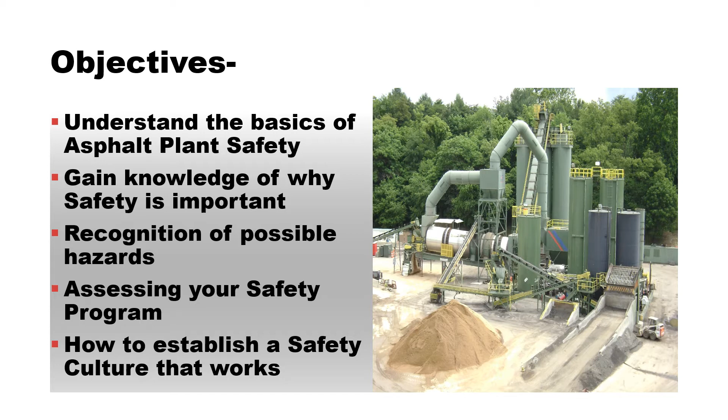Safety has to be valued by each of us and our co-workers to have a successful safety culture within our companies. The main objectives of today's training are really to understand the basics of plant safety and why safety is important within our facilities, hazard recognition, safety program assessment, and how to establish a safety culture that works.

Before we get into plant-specific safety topics, let's talk about Occupational Safety and Health Administration, or OSHA, 2018 statistics. Indicated on the slide are the number of fatalities that occurred within the construction industry. Of those fatalities, falls accounted for 33.5%. Each of these categories listed are OSHA's Focus 4 emphasis topics, which account for more than half of construction worker deaths nationwide. If these hazards could be eliminated, 591 lives in the U.S. each year could be saved.

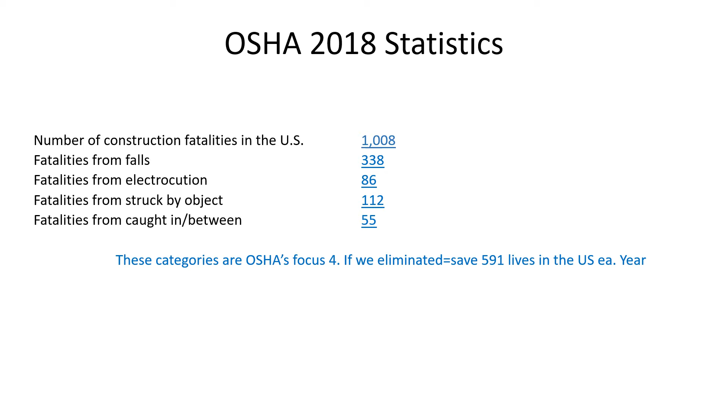All of these hazards are present within the HMA plant setting, so the statistics are relevant even though they are for construction and not specifically general industry. I think all of us can agree, at the end of the day, we want every worker to make it home safely to their family and loved ones. In an effort to make our employees safe, OSHA mandates that we meet certain safety standards to maintain compliance. We also need to be concerned with the human component or the behaviors of our employees.

The best way to start the work shift is in a daily huddle. These meetings have different names. To name a few, it's JSA, JHA, Daily Huddle, Toolbox Talks, Safety Talks. Whatever the name, the goal is at the beginning of the shift, the entire team gathers for 5 to 10 minutes to discuss the tasks for the shift and to identify what hazards are associated with the scope of work. Lastly, they talk about those hazards and how they're going to be mitigated.

So let's identify some hazards that exist at the plant, and we will discuss several of these in depth in the upcoming slides. There are many areas within the plant that burns can occur. Hot oil line surfaces, liquid AC, and tack transfer points are a couple. Maintenance frequently occurs at heights, so there is a need for a fall protection program. Electrical rooms and high voltage create hazards for our employees, and equipment in operation in our facilities, along with vehicle traffic, are definitely a safety concern.

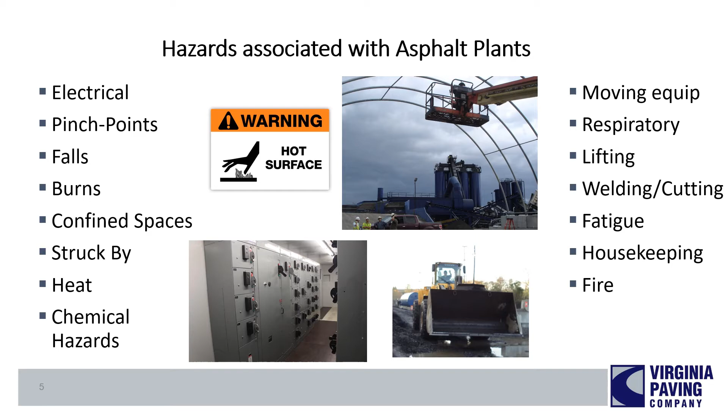The question is, who is at your plant? On any given day at a typical asphalt plant, there are numerous people that could be on site, both asphalt plant employees as well as numerous visitors that might only be there for the day or even just a few minutes. Therefore, it's critical that steps are taken and procedures are put in place to ensure the safety of anyone that might be on site for any length of time. Keep in mind, non-employees of the asphalt plant are quite possibly at a higher risk of injury due to their lack of familiarity with the plant operations and safety protocol.

Typically, our plant yards have a lot of movement between truck traffic, equipment moving around, workers and visitors on foot, and these individuals present potential hazards such as runover, backing incidents, distractions, lack of PPE, unfamiliarity with the plant setting, different safety cultures. Sometimes there's congested areas. So what can we put into place to minimize the exposure to these folks?

One of the tools we can put into place to get equipment, vehicles, and workers on foot and pedestrians safely around our sites is to implement an internal traffic control plan, commonly known as an ITCP. An ITCP is a process that supervisors and others who have responsibility for the plant site can use to coordinate and control the flow of construction vehicles, equipment, and workers operating on site, basically creating zones designed to minimize interaction between workers on foot and vehicles and equipment.

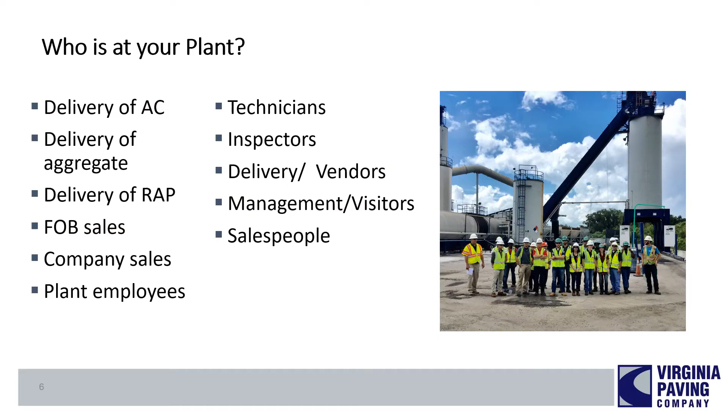Operational hazards are any condition or act that affects or may affect the safety of employees or associated personnel or equipment. Within our plants, there are many types of operational hazards, some of which are electrocution, struck by, caught between, and falls, which we talked about in the earlier slide with the OSHA statistics, and confined spaces. So let's talk about a few of these more in depth.

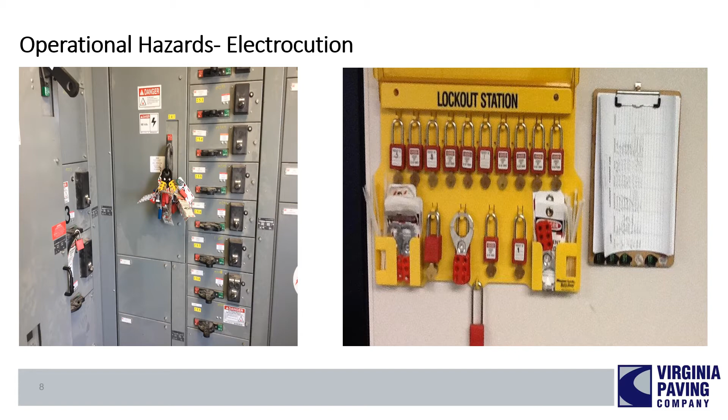While not a substitute for competent person lockout tag out training, let's identify the proper steps. To begin a shutdown, of course, we have to prepare. We're going to shut down, turn off equipment, isolate the energy source, apply the lockout tag out to the energy isolating device, release all potentially hazardous stored or residual energy, and most importantly, we're going to verify the isolation before the work begins. Then to start up, it's basically the process in reverse. Most important step here is to assure that all personnel are aware the startup's going to begin and that everyone is all clear.

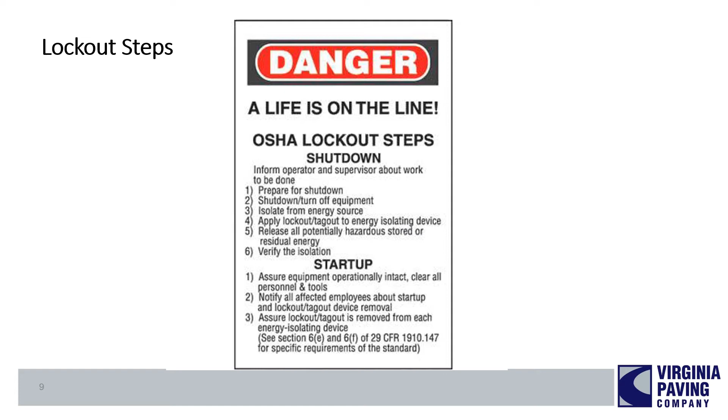What is also required training in the plant setting is NFPA 70E non-qualified or qualified electrical training, depending on the employee's role. To put these definitions into working day practice, a qualified individual is one that, as part of their job responsibilities, works with or may be exposed to live energized electrical components. The rest of the staff that does not have these functions or exposure are considered unqualified.

One of the more common burn hazards at the plant is related to asphalt cement. This product is continuously being delivered, offloaded, stored, and pumped through the mixing operation of the plant, all of which is being done while the asphalt cement is at an elevated temperature to reduce its viscosity and allow it to be mixed with the aggregate components. When producing asphalt, plant production temperatures are elevated enough so that the final mixture can be loaded out at temperatures in the range of 300 degrees.

Be mindful to stay out of equipment operating zones or EOZs. Establish visual or verbal communication with operators and drivers when you intend to cross in front or behind them, and once you've passed in front or behind, make communication to let that operator or driver know you're all clear. There are many blind spots on the equipment and vehicles. If you can't see the driver or operator, then they can't see you. Never assume. Backup alarms should be installed and functioning on all moving equipment such as loaders, skid steers, backhoes, and haul trucks.

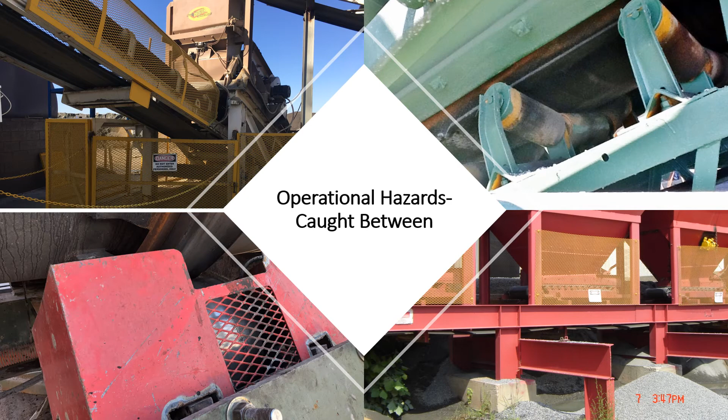Again, as a reminder, when routine maintenance or attention is needed, appropriate lockout tag out procedures should be followed.

There are several places at the plant where we will find confined spaces, some of which are the bag house, cold feed bins, silos, the drum, pug mills, drainage structures, and tanks.

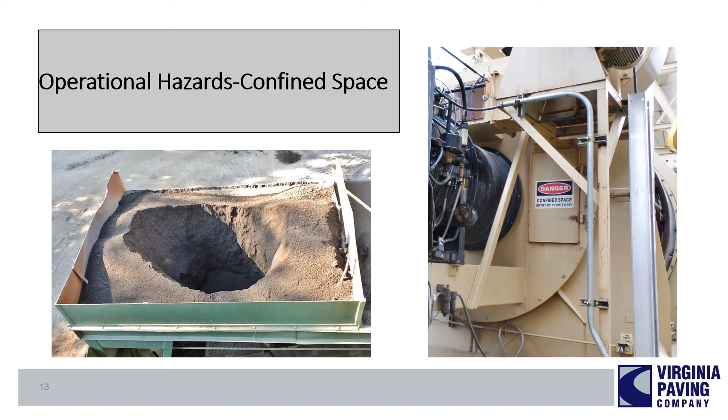A confined space means it's a space that is large enough and so configured that an employee can bodily enter and perform assigned work, has limited access or restricted means for entry or exit, and is not designed for continuous employee occupancy. Specific training for entry into confined spaces is required.

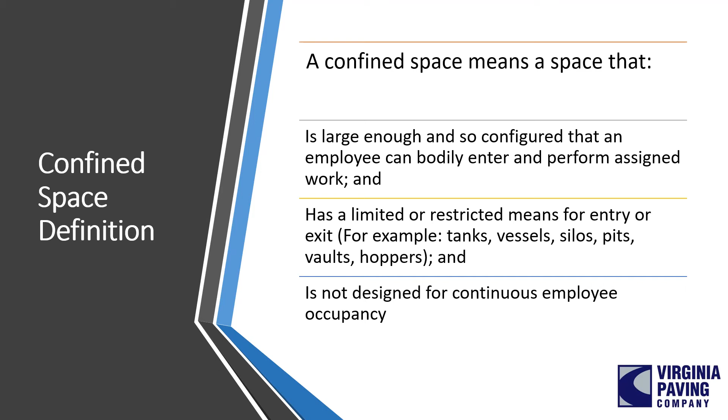A permit required confined space meets the definition of a confined space plus has one or more of the following characteristics: an internal configuration such that an entrant could be trapped or asphyxiated by inwardly converging walls or by a floor which slopes downwards and tapers to a smaller cross-section, or contains any other serious safety or health hazards.

Some confined spaces may require air quality monitoring and an active removal system. During entry, air monitoring equipment tests the atmosphere for dangers such as oxygen deficiency or enrichment. Competent person confined space training can provide guidance on when those measures are needed.

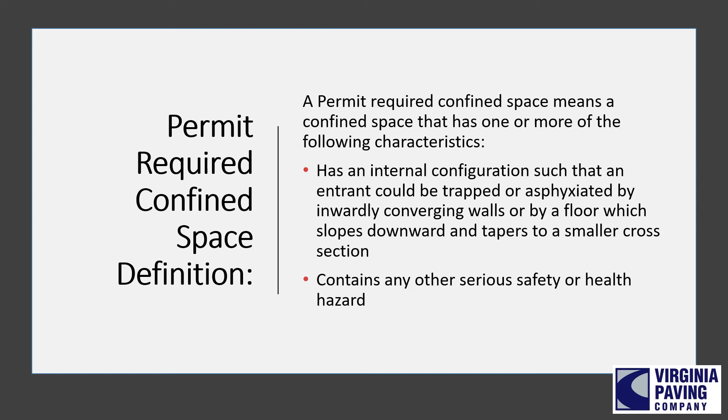Around the plant, there are many daily operational and/or routine maintenance tasks that require workers to be at elevated positions, which could lead to either serious injury or death in the case of a fall.

Some of these instances include work performed from step or extension ladders or man lifts, sampling mix on the sampling rack, working on top of the silos or the bag house, walking on catwalks, or simply getting on and off large equipment. In many of these cases, proper utilization of harnesses and other safety gear practices should be followed.

To prevent falls, 3-point contact is a safety practice that should be used and used properly: 2 hands 1 foot, or 2 feet 1 hand. You want to hold on with good grip, even if your descent is not far, in case your footing slips. If you had to face forward to climb up, face forward to climb down. Never jump from equipment or vehicles.

There are OSHA standards in place regarding fixed ladders. OSHA 1910.28 requires that each employee is protected from falling in a ladderway floor hole or a ladderway platform hole by a guardrail system and toe boards erected on all exposed sides, except at the entrance to the hole where a self-closing gate or an offset must be used.

The yellow self-closing gate pictured at the top of the fixed ladder is what many of our plants have been outfitted with due to this requirement.

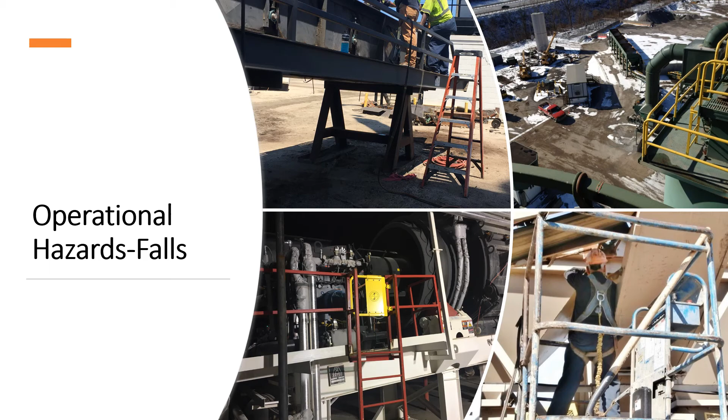We have briefly mentioned a couple maintenance hazards during previous slide discussion. Routine equipment maintenance is going to occur. Tasks such as welding and cutting, changing bags in the bag house, changing flights in the drum, changing belts, or simply addressing hydraulic leaks are eventually going to be necessary.

So when it does, always practice good safety procedures such as lockout tag out and the buddy system. Any tank welding and hot work should have special consideration as these operations are high risk.

The use of cranes for maintenance is sometimes necessary. Make sure trained personnel are operating the crane and assisting with rigging and signaling. And as a reminder, there are specific requirements when critical crane lifts are being performed.

Hand and power tools need to be inspected prior to use and always utilize the right tool for the job. Pneumatic tools are commonly used during maintenance.

In the photo, you can see an individual using an impact gun in the drum to remove nuts from flights for replacement. While backing the nut off, his left hand got caught between the handle of the impact gun and the drum, leading to a first aid caught-between injury, even though he was wearing gloves. Was this the right tool for the job he was doing?

Air compressor connections should be secured to eliminate the possibility of hose disconnection during use.

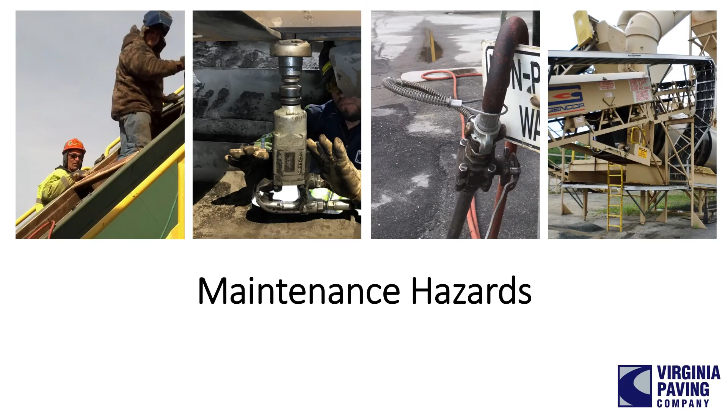There are some health hazards encountered at our plants. There should be team members certified in first aid and CPR at our facilities. Industrial hygiene testing should be conducted to determine if thresholds are or are not being exceeded for hearing and respiratory requirements. In 2018, OSHA rolled out mandated respirable silica dust standards within general industry that apply to our operations. These standards can be found in 1910.1053.

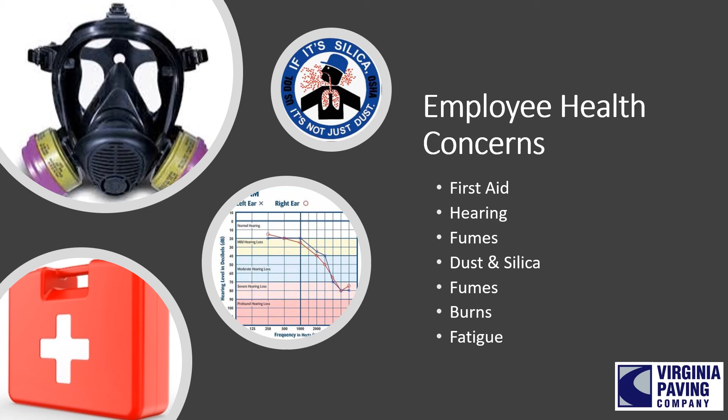Varied shift and long work hours could lead to fatigue for our plant personnel. Hours and shifts should be managed to minimize this potential hazard.

With all the work and activities that occur daily, the potential is high for areas of the plant not to receive the attention it needs to stay neat and orderly. Work areas like the shop and/or lab will see lots of activity while the plant is in production, and if ignored, can quickly become cluttered or disorganized. Areas at the plant that usually need routine attention are under conveyors, around the scale house, within storage rooms and containment areas, on catwalks, and in electrical rooms. If ignored, trip hazards and/or injury from falling objects can occur.

When a storage room is kept orderly, it not only eliminates slip, trip, fall hazards, but also saves time. If someone is looking for a specific tool or repair part, they don't have to waste valuable time rummaging around through several places to find it.

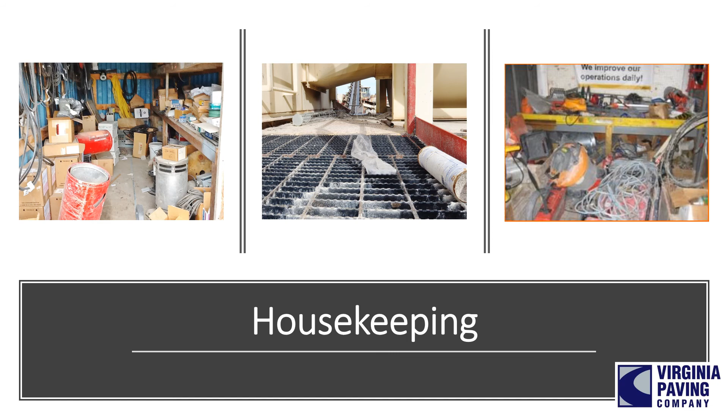Conducting a safety walkthrough of your site is important and determines what hazards exist in your workplace and what PPE is required for specific tasks. At my company, we utilize what we call a MESH inspection, MESH standing for Mechanical, Environmental, Safety, and Health. Individuals from these departments partner on a monthly basis to conduct walkthroughs because these folks are looking at the facility from different perspectives.

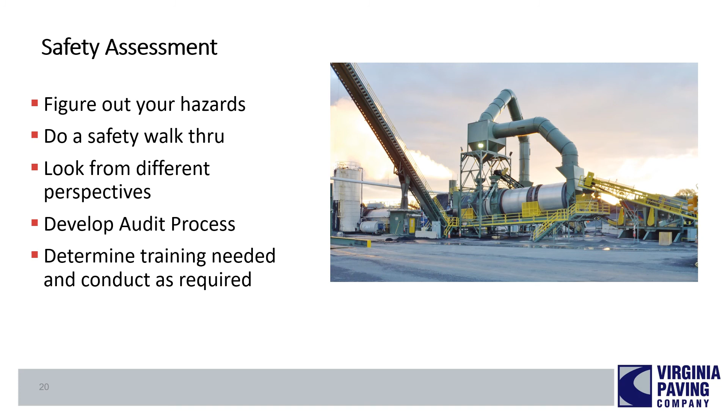Look for ways to reach out to local emergency services that would be called on to respond when something goes wrong at our facilities. By inviting them to visit your plant site and familiarize themselves with your daily operations and equipment, it can assist them in developing a crisis plan to respond if the need ever arises. There might also be an opportunity to perform drills with first responders to plan for the unexpected.

One of the best ways to promote safety around your asphalt plant is by keeping your workers involved. If the crew is kept engaged and part of the program, they will begin to work as a team towards establishing and maintaining a safe work environment, which leads to a stronger safety culture.

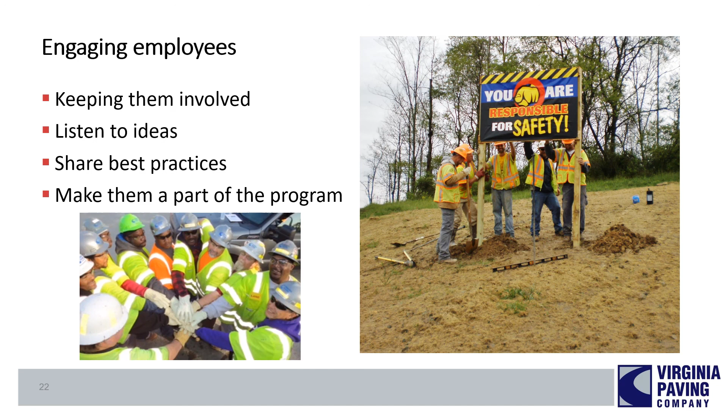If you're utilizing the safety huddles I talked about in an earlier slide, this provides an excellent opportunity to engage team members about safety, even having them point out potential safety hazards. Our frontline folks are the ones performing the work, and they have good ideas. We need to be willing to listen to their ideas and implement those that will work to improve the overall safety of the workplace. Promote an atmosphere of sharing best practices with one another, especially those new to the plant crew. Be a team.

Going home safely every day to the worker's family has to be a real, true value. It's not just fatalities that impact families - the latter is so true. A life-changing injury not only impacts the employee, but their whole family or support system.

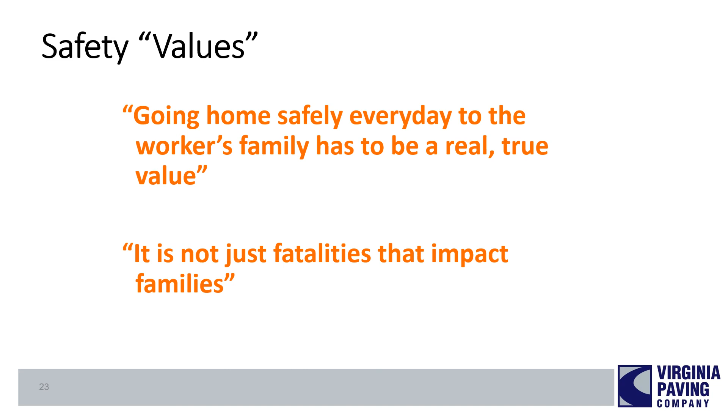Why do you work safely? And why, most importantly, do I work safely? I think we all have the same reasons: to be able to do the things we want to do in life, and the biggest one, for our family and ourselves.

How do we preserve a company's greatest value? What we allow, we teach. If we don't take the time to correct a bad safety behavior or condition, as leaders, we are teaching our employees these behaviors and conditions are acceptable.

We must walk it like we talk it. Our employees are looking up to us as mentors and leaders, and we should lead by example, not practice a do as I say, not as I do approach. As construction leaders, we owe it to our folks to promote safety. It's just that simple. Thank you so much for your attention during this presentation.